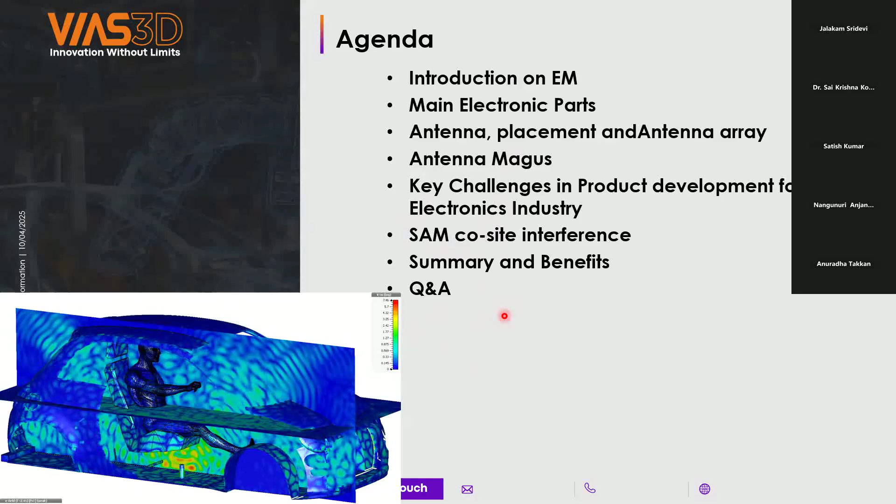So to start with the introduction, I'll just hide these. Okay, so we'll start with the introduction. What is electromagnetic, from where it started?

We know electromagnetic phenomena deals with all types of electromagnetic components. When we talk with respect to frequency, we know it starts with static, then goes to higher frequency ranges. All these components come under electromagnetics, and we can simulate all these components also.

Started with static, which is like low frequency or 0 hertz, we can say DC. If you comment about the application, something like touchscreen devices will come under the static frequency range.

If you comment about the application, going into the higher side of kilohertz frequency ranges, we have applications like transformers and wireless charging devices.

Going ahead in megahertz, gigahertz, and terahertz frequency range, the applications like RFID tags and some megahertz frequency antennas. Then at gigahertz, we have applications like mobile phones, and at terahertz, we have photonic devices. So these electromagnetics divide depending on the operating frequency they work on.

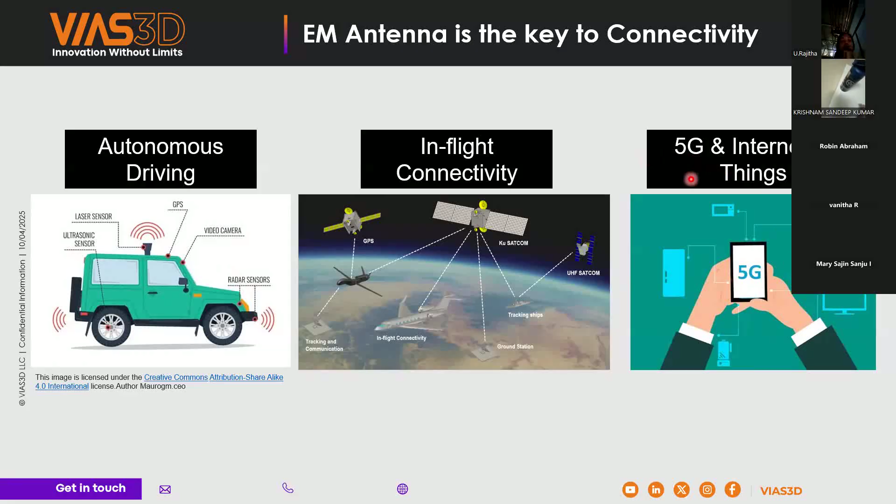So when we do total system analysis or any simulations, we have to worry about all these co-simulation components also, which make our antenna performance change. During this process, we have to work on multiple things where we have the workflow, how we start simulation of any RF component. And at the end, when we limit ourselves to the antenna, we have to do the simulations called antenna placement, where we see, once I place my antenna in an exact location in any application, how the performance of that antenna will be. So that will be the end thing for an antenna engineer, I can say.

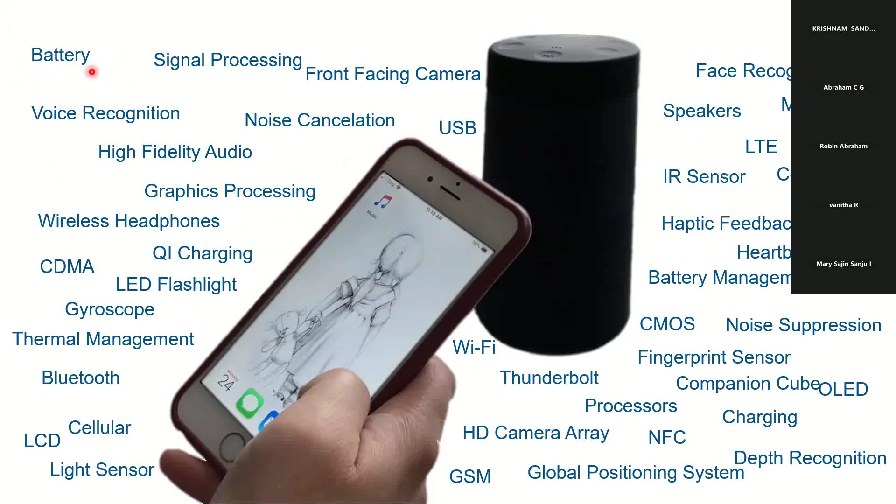If you take another example, like these speakers, which are bounded by multiple RF components, like IR sensors, USB devices, Bluetooth devices, Bluetooth antenna, Wi-Fi antennas, and multiple RF components. Again, the battery is also very vital to change the performance of the electromagnetic wave. So all these are application oriented. In any example, everywhere the electromagnetic waves are there and they affect the performance of your antennas also.

So if you see the key challenges when we go for any product development, take a mobile phone as one example, which is bounded by multiple antenna units, PCBs and all. In mobile we have 5G antennas. If it is LTE, then we have 4G LTE antennas, Wi-Fi, GPS, GSM, DCS, and again 4G LTE antennas. So it is bounded by more than 10, 15 different types of antennas, which makes the product very challenging because of the interference happening due to nearby radiative elements.

So we have to do the co-simulations also, where we check how much interference is happening once I excite, let's say, GSM antennas. And if you see this Wi-Fi antenna, which looks like an inverted F antenna, how much interference is happening. So when we talk about product development, we have to see all these interferences. At the end, we have to very easily place this RF component into particular areas.

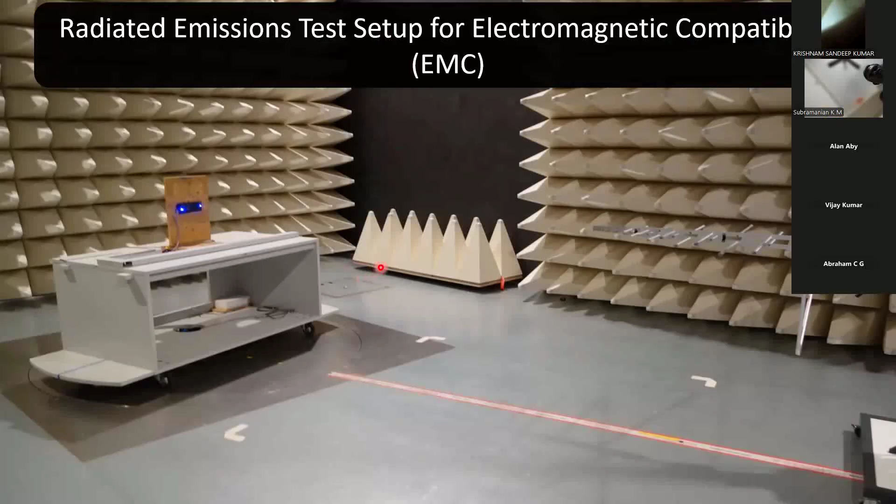And once we come up with the hardware, we have to go for an EMC test setup, where we do radiated emission simulations. So here we can see how simulation will help you. If you go directly into the measurement stage, we know 50 percent of electronic products will fail. So it is very essential to go for a simulation before going for a direct measurement setup.

Now, another example is the automotive industry, a car. The components which affect the electromagnetic wave are sensors. Multiple sensors will be placed inside a car. We have a battery unit, electric devices, and drives. Mainly, we have antennas, control units, and a cable harness also.

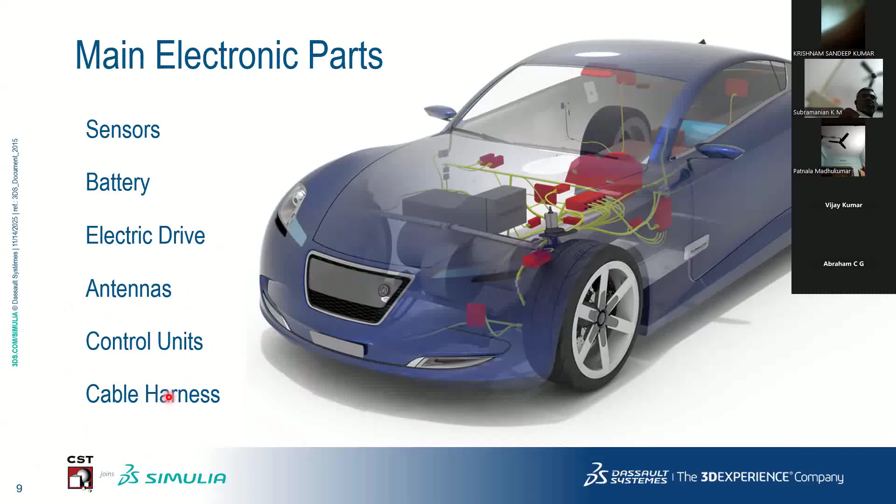Mostly, we have seen in the automotive industries, their R&D is going on to reduce the weight of the car. And we know 50 percent of the weight of the car is due to the cables inside a car. So to do any R&D on any vehicle, we can do this cable harness analysis also, which is very important. Now this is one small example of what components are available when we talk about a vehicle.

Hopefully you can hear this audio.

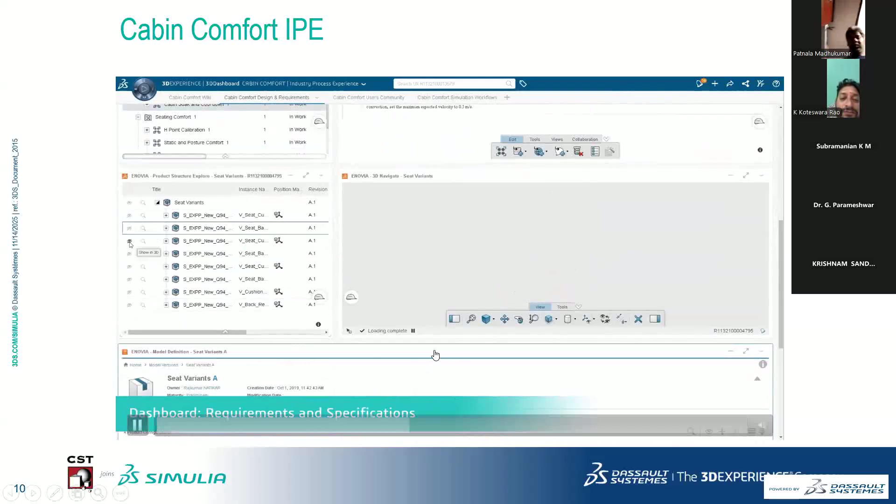So we can see here how any car can be designed connected with CATIA, electromagnetic CST, and Abaqus for structure analysis.

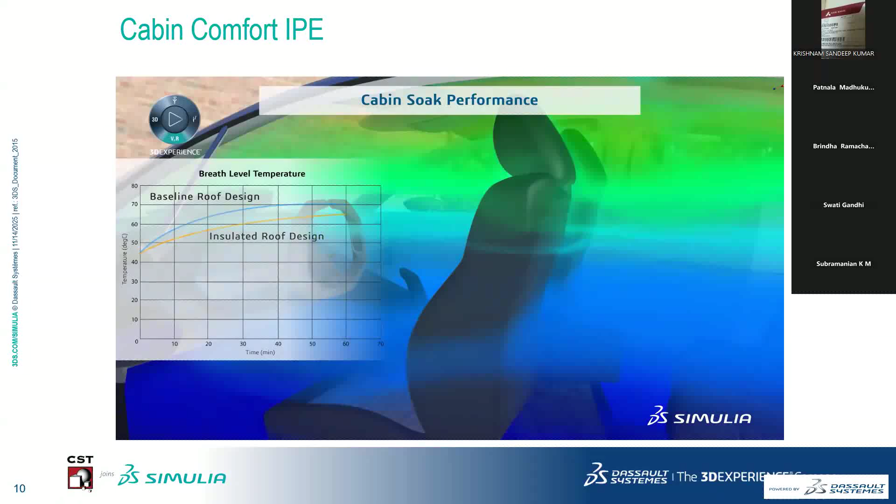So like this, there are multiple things when we take any example into the automotive industries or anywhere. We need to worry about all these aspects, starting from the designing till the final stage of that device. Again, design will play a very vital role. Then again, electromagnetics will be there because most of the components which are available in any car are electronic devices. The same thing applies for costing also, how it goes year by year once we do electronic performance into that.

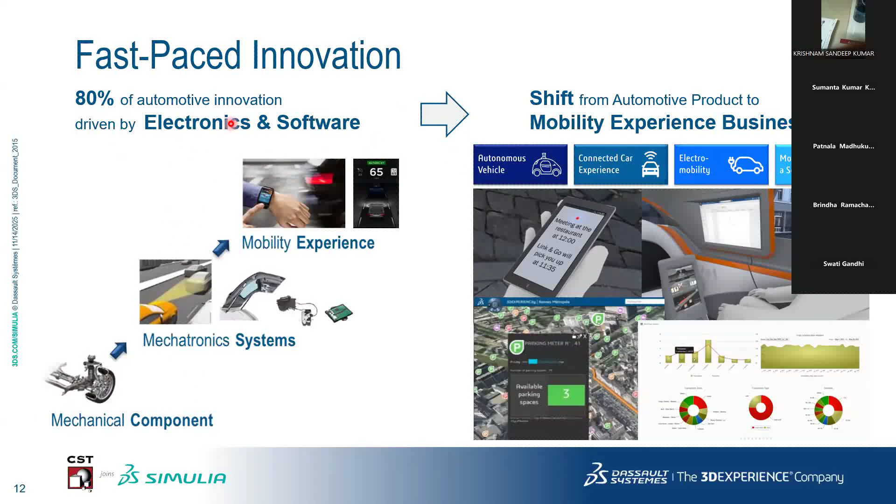So in the current market, where innovation is a preliminary task for all the automotive industries, we can see 80% of automotive innovations are driven by electronics and the software which are combined in any device. Again, the mechanical component is very much essential as well, but with that, electronics are also booming in the same ratio. So today's outline of the communication is the electronics side.

These are the three things: radar, where all the antennas will be available. Then we have connectivity, where we see how devices will communicate with each other. And external performance away from the car, how our electromagnetic waves are being radiated.

So if we talk about antennas, where are the antennas? If you take any industry, starting from automotive, aerospace, marine, offshore, high tech, robotics, and space, in most industries, to do the connectivity between individual elements, we need to have an antenna there. So antennas are everywhere, and they are an essential product when we do any analysis.

We'll go one by one, starting from a car, where a shark fin antenna will be placed on the top. It is also a rooftop antenna, where multiple antenna units will be placed. To have safety from the electromagnetic environment, it is covered with a radome. You can see here something like this color. The outside boundary is nothing but a radome, which gives shielding for your antennas from the environment or climate. All these analyses we can do in the electromagnetic simulation software, which is CST. Apart from that, we have multiple antennas placed inside any automobile.

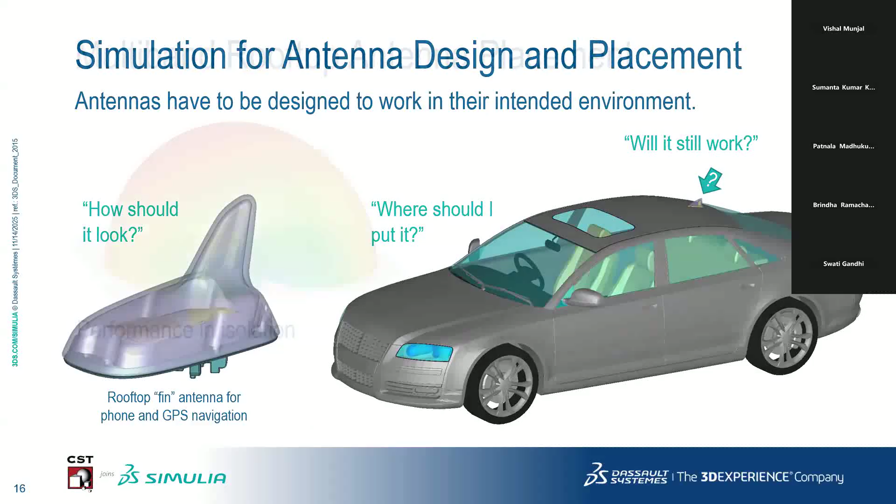Again, once we identify the location and keep that antenna there, we need to check whether it will still work or not. So the final check is done once we keep our antenna at the exact location. Only then will we get the certification from the automotive industry to place this antenna in this particular location.

You can very easily see by naked eye how the performance is changed. Once I simulate an isolated antenna with a radome, which is a casing for our antenna, I'm getting a perfect dome-shaped radiation. But once we place the antenna in a real-time environment, the performance will be degraded. So we get a very good idea at the simulation stage itself by placing my antennas in a real-time environment simulation.

Again, this applies for all. If you're working on any application like a smartwatch or wearable devices, you can do antenna placement simulations, where you can import the casing of a car, place the antenna in a particular location, and see how the antenna performs. How this can be done? Here multiple things will come into the picture.

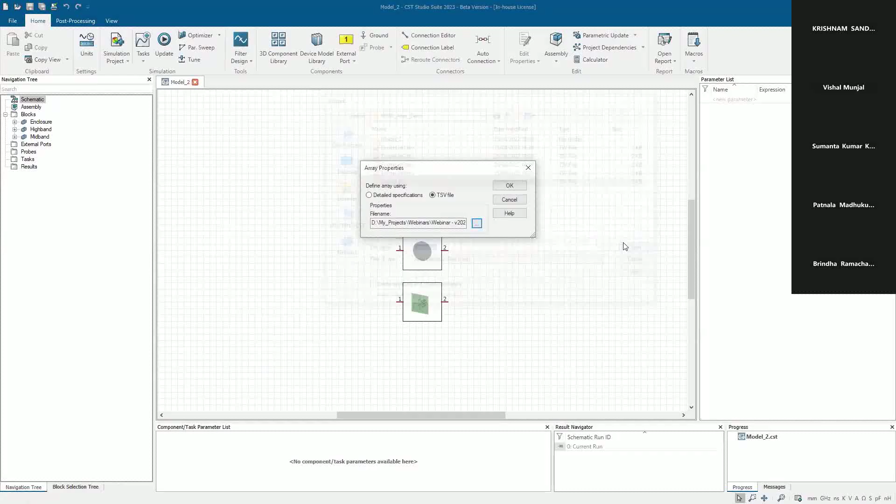I'm going to showcase an antenna array concept, how an antenna array can be simulated in CST Studio Suite. Starting from a single unit to an array, how it will be created, then bounded by a casing unit, and once I excite individually or cumulatively, how the performance changes. Here we have excitation by grouping, where we can excite a particular group with the same phase, and another with a different phase. That grouping you can do in CST.

Hopefully you are aware of CST electromagnetic simulation software. If not, then if time permits, I'll show you how these things can be done in real CST also. Here we can do the excitation part also, how I want to excite this. Same thing, you can import the excitation pattern also into CST.

Same way it applies to all the individual elements. So if you need simultaneous excitation or individual, you can select that also over here. These are mostly required for the phased array antenna concept, where we have to steer a beam. In the simulation part, you can have individual or array simulations also.

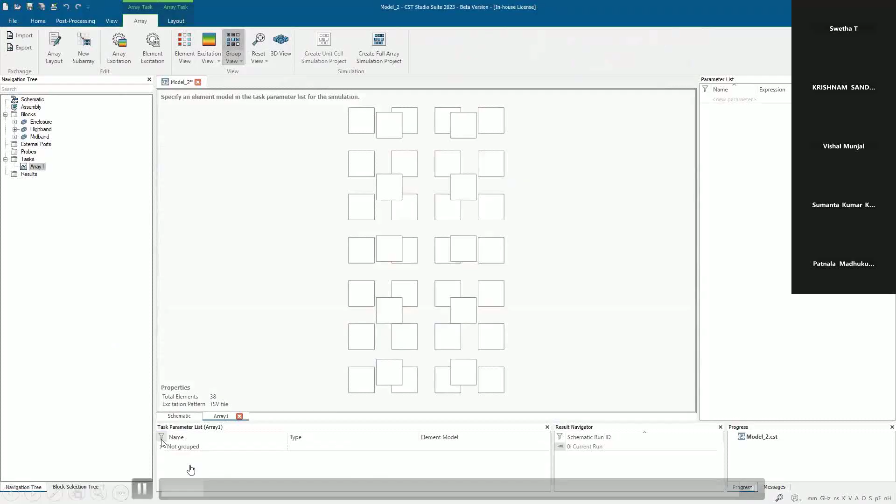Here you can see this is nothing but a casing, which is a radome in our case. Then we have the PCB excitation unit and then antenna units also. And once I give the excitation, you can see our final product will be available over here. And you can select here which way of excitation I need to do: excite all these array elements with simultaneous excitation or sequential excitation.

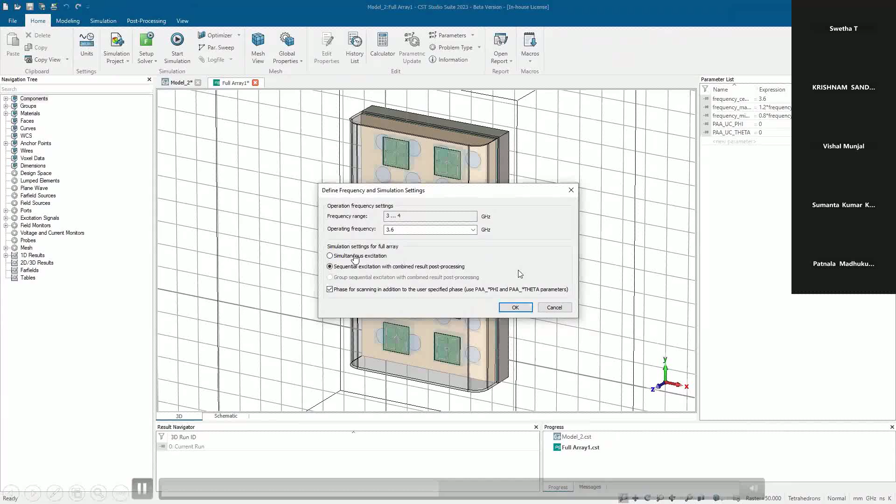So everything is inside a single environment; we can see we have this casing, the excitation units, radome, PCBs and all. So everything can be imported inside a single environment. And we can see how all these meshes will be available. If you want to give any user-defined mesh, that is also available, called local meshing. So that also you can give here.

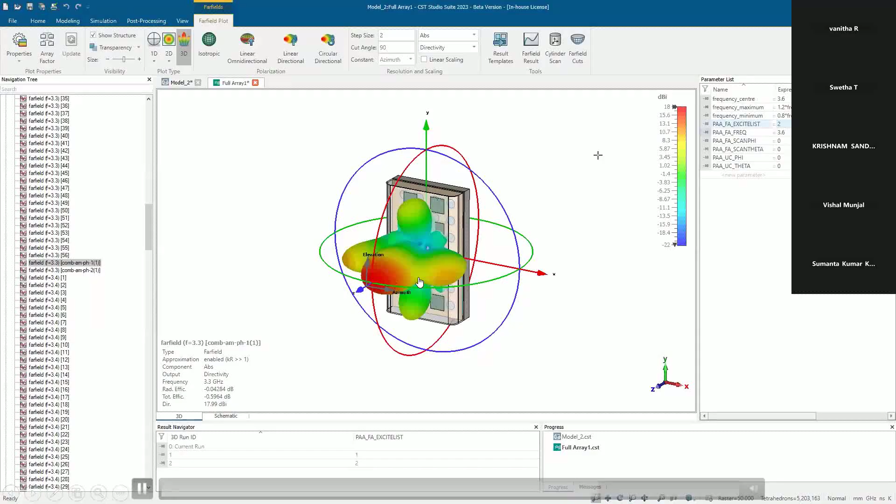I'll not stop here, but directly we can see the result, how the radiation pattern of individual elements can be seen, and combined also we can see here. This is nothing but the combined excitation of our array structure. Some post-processing can also be done, and we can see after post-processing how the performance is.

Co-polarized wave, cross-polarized wave, both we can see. So theta equal to 0, theta equal to 90 cuts, all these things can be very easily evaluated with the help of the CST software.

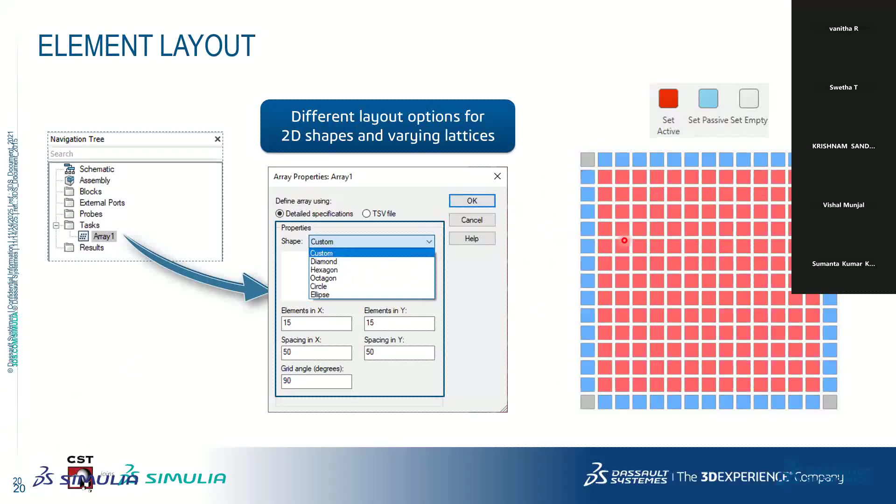One of the add-on features I would like to introduce here is the array task. For those who are working on the antenna side, this will be very important, how the array task can be used here. So firstly, as we always design a single element, we can proceed with that. After creation of a single element, we have this array task available here. You can see on the screen, left-hand side, array task.

With a single click, we'll get a new pop-up window. We can select which shape I need my array to be in: diamond, hexagon, octagon, circular or ellipse. So we can select any one of these shapes. You can select along the x-axis how many elements I'm looking for, and along the y-axis how many elements I need. So that element number we can give here.

If you need any additional spacing between individual elements, you can assign it from here also, which is available here. And there is something called set active and set passive. This is very important. So if you want to excite all the elements available in the array, you can set all as active so that you can give any phase shift if you want.

If you just need them to be passively available, so that you don't need to excite those elements, you can make all these elements set passive also. Okay. So that way you can keep these elements as set active and set passive.

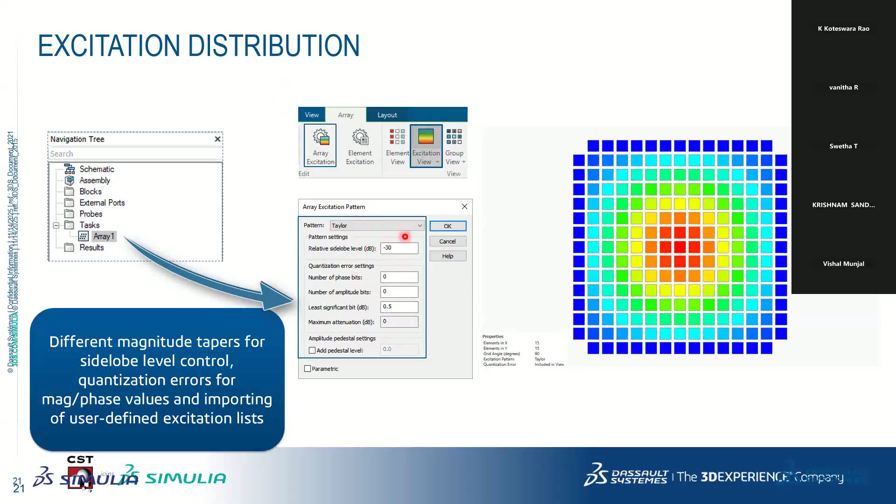So in this case we have this Taylor pattern, but again we can import any different excitation pattern also. So this way you can import things. If you want to excite from outside of this one, we can import using the .tsv file. And how the tsv file can be created, you can see it here. We have the positions, excitation, and rotation of the elements, considering theta and phi.

Again, this is very important. I'd like to divide this into system level analysis. If you have a system which is very good and high end with GPUs and hardware acceleration, you can go ahead with the full array simulation task. But if your system is very small in configuration, which makes it difficult to simulate the big structure, you can go with unit cell analysis of an antenna also.

Again, I would like to touch upon one more point, which is metamaterial analysis. Those who are working in that aspect need to set up this boundary condition as a unit cell also. The same thing you can consider here, which is a finite element analysis thing.

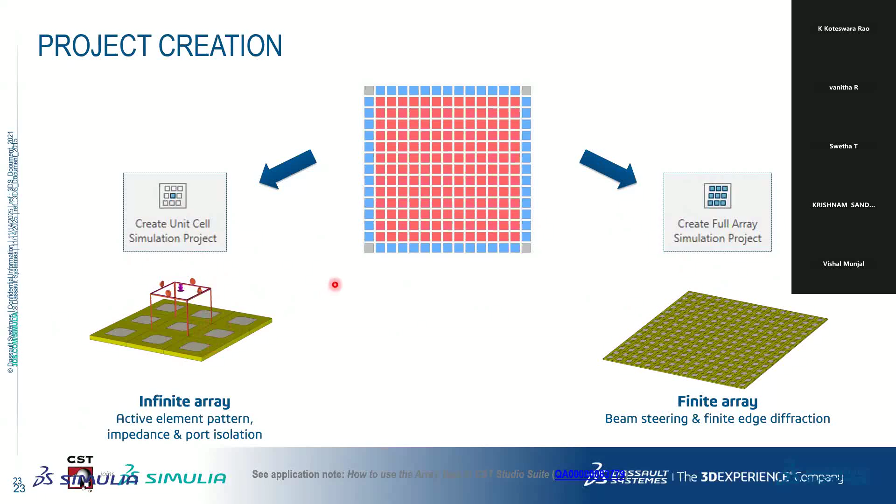Again, there is one more synthesis thing, which is Antenna Magus. For those who are working in industry and new antenna engineers, this antenna synthesis tool is very important, where Antenna Magus has multiple inbuilt antennas. So you just need to give your inputs. Let's see if I have it here. No.

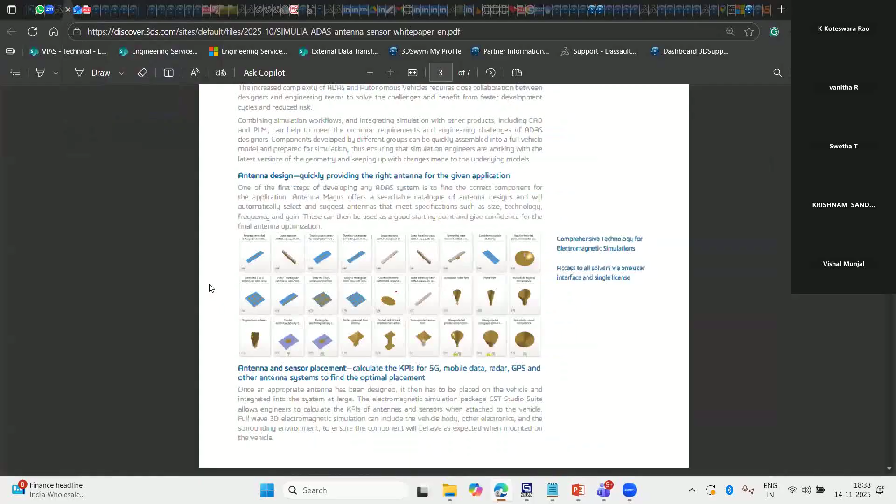So you just need to give some of the inputs, like what is the operating frequency of your structure, what are the goals you have. If you give those inputs, I'll just see if I have a PDF with me. Yeah. If you can see on my screen, these are the inputs you need to give. And depending on the selection of applications, you can get multiple antenna units on your screen.

Okay. And you can straight away just click on that and export those 3D structures inside CST. That is very useful for those who want to design multiple antennas in a short time, mostly for industries where operating frequencies and bandwidth change continuously. So for those, this is very important.

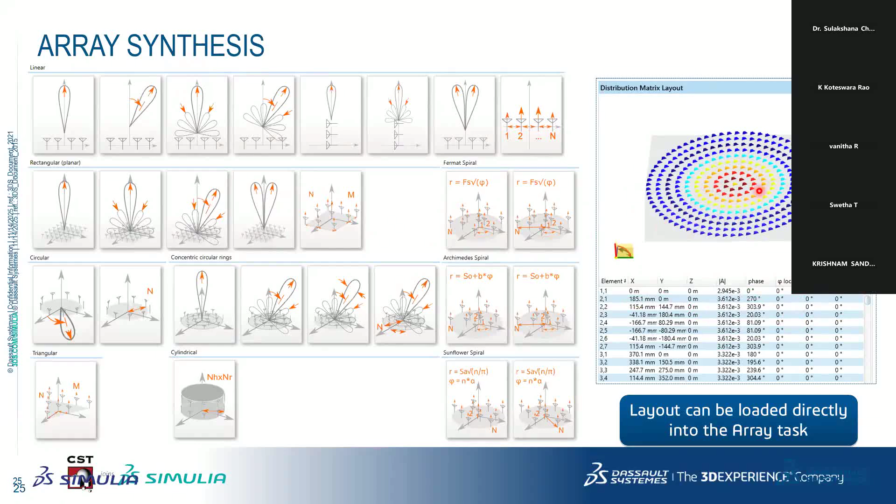Again, in Antenna Magus, we have antenna synthesis for the phased array antenna concept. If you want to tilt a beam in a particular direction, if you want beam steering, how much phase do I need to give. You just need to give the inputs, what layout you are going to use. Once you give those inputs, you can directly get 3D structures and export them into CST.

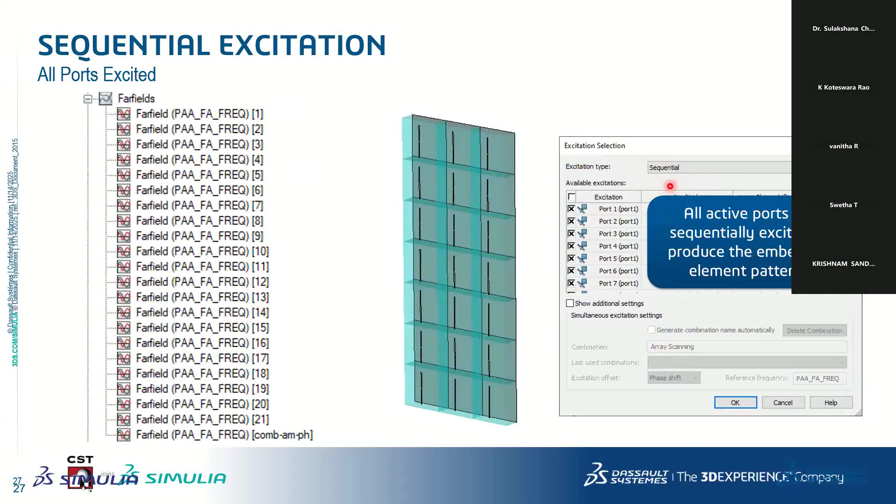And at the end, as we have seen total array excitation, in CST you have something called sequential excitation, where you can excite all the ports with different excitations. Let's say I have around 21 different elements, and I need to see the performance of each individually. With this excitation we can see how my eighth antenna is radiating, or the 11th, or the 21st antenna. And we can check the performance of a grouping of them also. Okay, hopefully this is understood by all.

Now, if you go into vehicle connectivity devices, if you take any one of the antennas, which is a Bluetooth antenna, 1 minute, yeah, Bluetooth antenna.

So in a vehicle, wherever the Bluetooth has been placed, whether it is covering all the units or not. Okay, so let's say you have Bluetooth devices located at a particular location. How your field is traveling, you can do that analysis also in CST Studio Suite. Let's say our Bluetooth device is operating at 2.45 gigahertz. With the help of electric field excitation, we can see where my electric field is traveling.

So you can see here in this case, our Bluetooth has been placed over here, and its electromagnetic field is going in this direction particularly. Very easily you can see the strong waves are going on the top side of the car also. So this is when there is no human or person in the car. But let's say when there is someone in the car, you can see your electric field is changed. Visually itself, we can cross check the performance of both.

But once we communicate with the human body, we have to see whether the electric field it is generating is hazardous for the human body or not. That is called SAR analysis, which is specific absorption rate analysis. Again, this analysis also you can do in CST. Okay, hopefully this is understood for all. Again, what we are discussing is one of the capabilities available in CST Studio Suite.

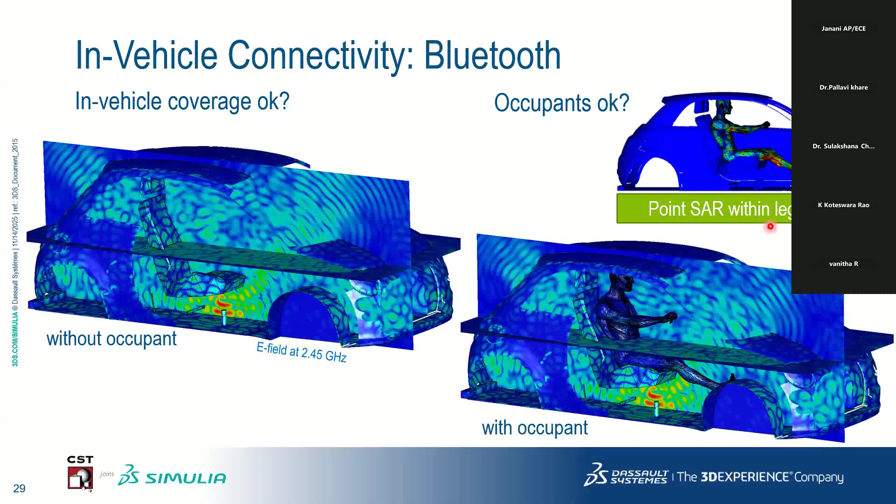Again, as we have seen, in any car we have multiple antenna units and PCBs. So we need to go ahead with co-site interference analysis also. We are limiting our thing with respect to the car, but the same applies for all industries. If you are working in automotive or space or aerospace or marine, everywhere you have to do the co-site interference analysis.

Okay, I think someone is writing something. Can we erase this? Can we remove these lines? No. No, something came on the screen. Option disabled only, sir. Option is disabled only. Disable? I disabled the writing options actually. I think someone has written just now, but I'm unable to remove it. I'm changing the slide, still it is there. Oh. I'll do one thing, I'll stop sharing and then share back. Yeah, great, sir. Is my screen visible now? Yes, sir. Yes, sir.

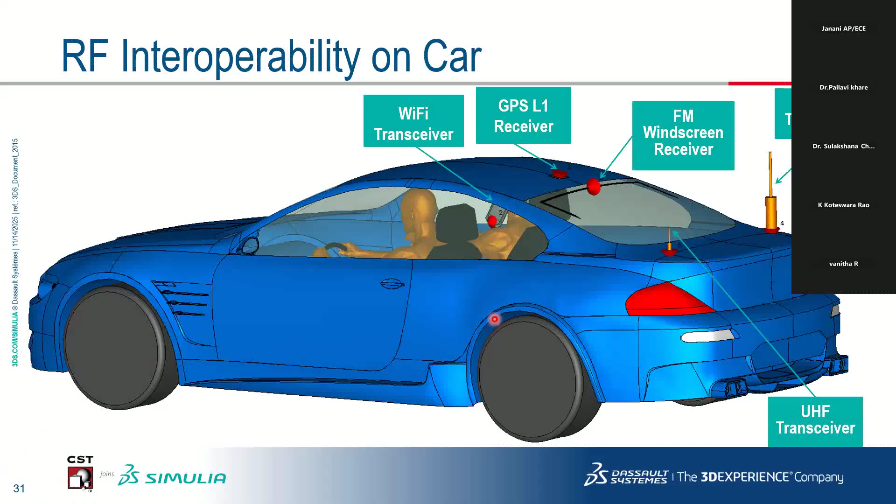Okay, thank you. So we can see in the co-site interference what elements are available. We have this Wi-Fi transceiver device, this GPS receiver, then FM windscreen receivers, VHF antennas, and UHF antennas. So all these are devices where we have to see how much interference is happening between these individual elements, and whether it is required or not. Like electromagnetic interference and compatibility: if it is in-band, we have to worry about that. If not, we can ignore those interferences.

Then how can we do these simulations? These simulations are possible in SAM modeling, which is system assembly and modeling, where we have multiple antennas. You can see here, this is one of the biggest advantages of CST, where you can have a car, which is an MCAD file with mostly mechanical information. The same thing we can convert into electromagnetic. So we can import that car in CST, and it will be created as a block available here in the schematic.

We can do all these individual simulations first. These are the 5 different antennas: UHF, VHF, FM, GPS, and Wi-Fi antennas. And all these will be imported into the schematic of CST. If there are any connections available, we can assign them. Again, by drag and drop, you can make all these antennas and the car available.

To place all these antennas at the exact location, we can use something called anchor points in CST. With the help of anchor points, all these antennas will be fixed at a particular exact location. Once you place them, you can see all these antennas will be available. And this 1, 2, 3, 4 is nothing but the excitations which we are going to use.

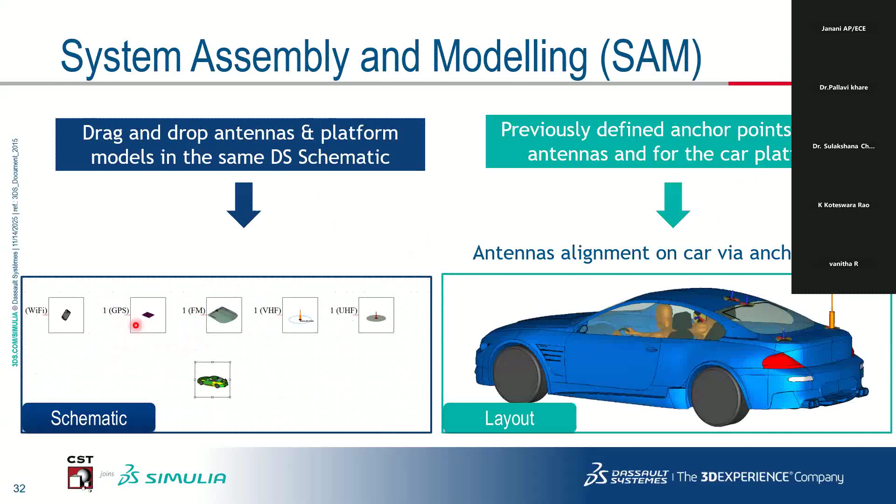To do the simulation, as we know, we need to excite that element, and before excitation we have to do the meshing of that. Depending on the solver, all the structures will be meshed. In this case, around 104 million mesh cells has been used to simulate all these 5 elements which are placed on a car. A time domain FIT solver has been used to do the excitation of these 5 elements.

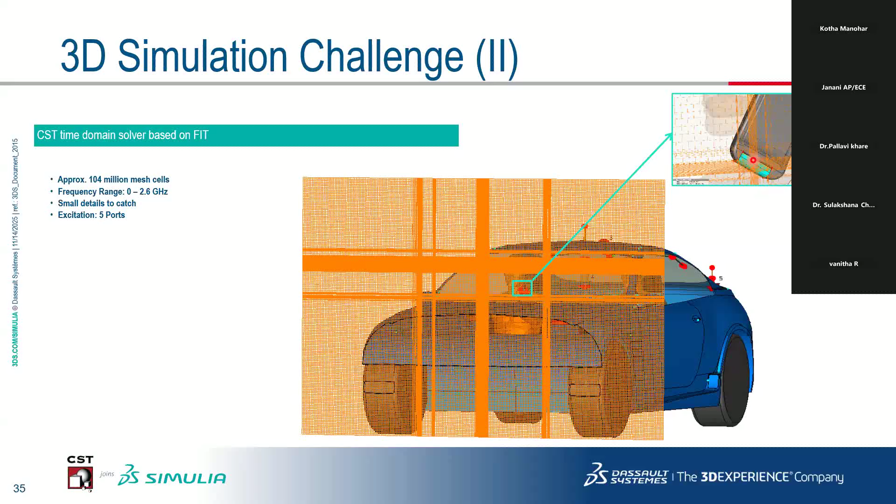Same thing as I told you, we can have these local mesh properties also, depending on how much dense mesh we are required for a particular region, we can assign that. By zooming in, we can see how this mesh has been assigned.

Okay, any doubt till this point? Any questions? If you have, we can discuss.

Audience query: Sir, can we use HFSS in case of this software? Response: I'm not aware about HFSS much, but as we are discussing, CST is having this capability where you can do all these antenna placement simulations with multiple solver capability.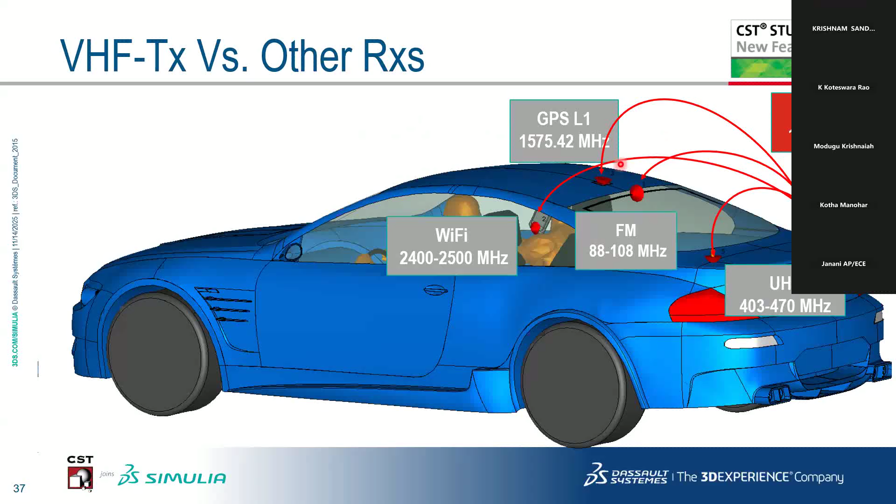Sir, with a human being, the electromagnetic radiation pattern has changed, right? Suppose if there is an object within a car, will there be any similar effect as a human being sitting there? We can create that environment, but for sure, the reflections will not be the same. Whatever the human body will do as absorption and reflection, other reflecting materials cannot do. So performance will change if there is any reflector there. And if you use two different conductors also, the performance of all the individual conductors will be different.

Yeah. So any other queries? Sir, can I ask you regarding the arrays?

Yes. Sir, in designing arrays, you have shown all the elements and how to give the phase excitations, everything, the amplitude excitations or phase things — a separate module is there in CST that you can use. But if we want to design our own circuit, like power dividers or phase shifters in CST, and integrate with the basic antenna array, and if you give the individual phase or amplitude excitations directly to the array, you will get a certain amount of gain, right?

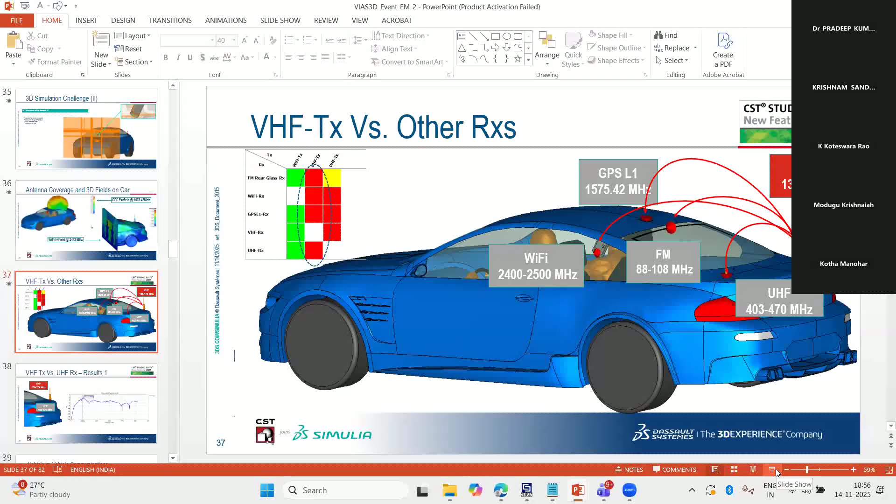So something like co-interference analysis of placement we can also do. If this power is affecting things in a bad way, then we can increase the distance, or use a metamaterial or something in between so that there will not be interference, or the interference can be reduced. We can do that optimization.

If you look at vehicle to vehicle communication, you can see this dedicated short range communication for vehicle safety or traffic control, mostly we go ahead with 10-meter spacing simulations. Both vehicles are apart from each other at 10 meters. This is very useful and important for ADAS radar systems, where we have transmitting and receiving antennas to identify how much gap is available between the two vehicles.

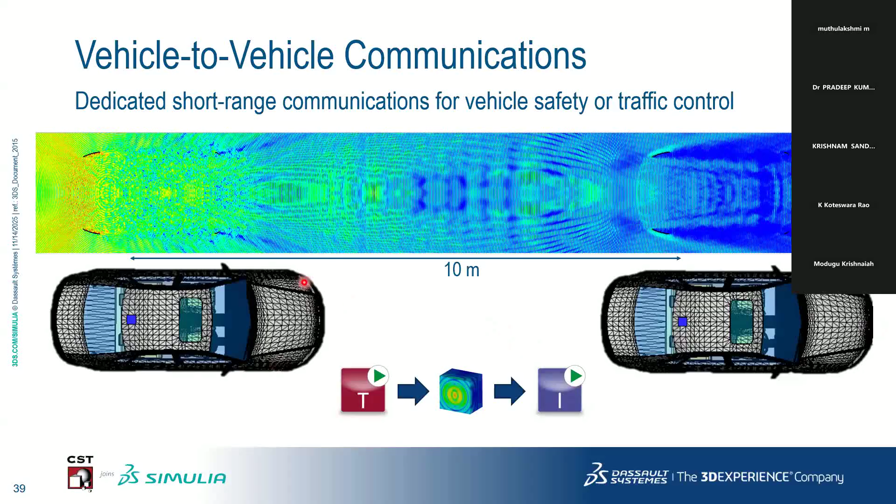Now talking about connected vehicles, these are the four analyses I can put forward: FM and DAB antennas, multi-band rooftop antennas which we have seen, connected vehicles or vehicle to vehicle communication, and ADAS radar operating at 77 gigahertz to identify how much object distance, or what is the gap between your transmitter and the object.

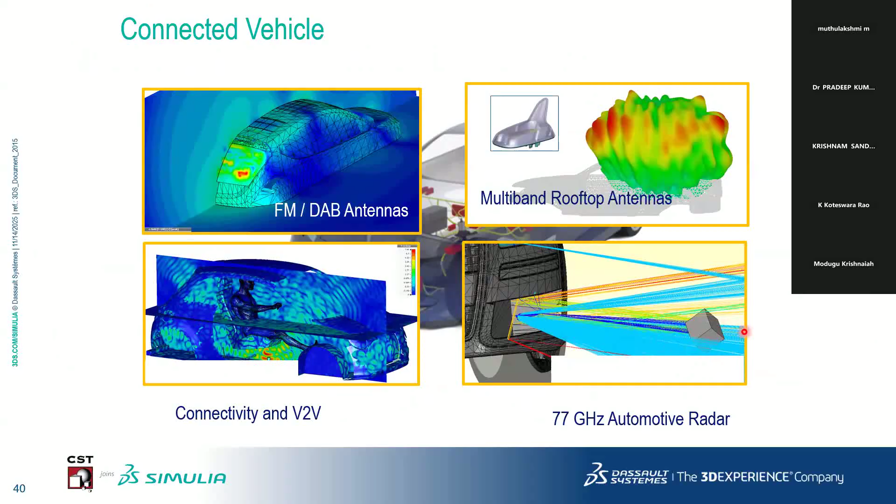With the help of ADAS radar analysis, we can very much easily check from where to vehicle is there, how much amount of speed is there, whether we have to reduce or not. That analysis is there, but also the electromagnetic side, we can identify that by placing the antennas into it.

Vehicle to vehicle communication or vehicle to anything communication, we can do that also in CST. Shielding effect is very much important here in this analysis. Whatever system has been designed, shielding plays a very vital role. How much gap between consecutive vehicles should be there? That will be answered by your system also here.

This analysis also you can do in CST, whether you have a bus which has been meshed by the integral equation solver, and we have the car as a radiative element can export its radiation pattern.

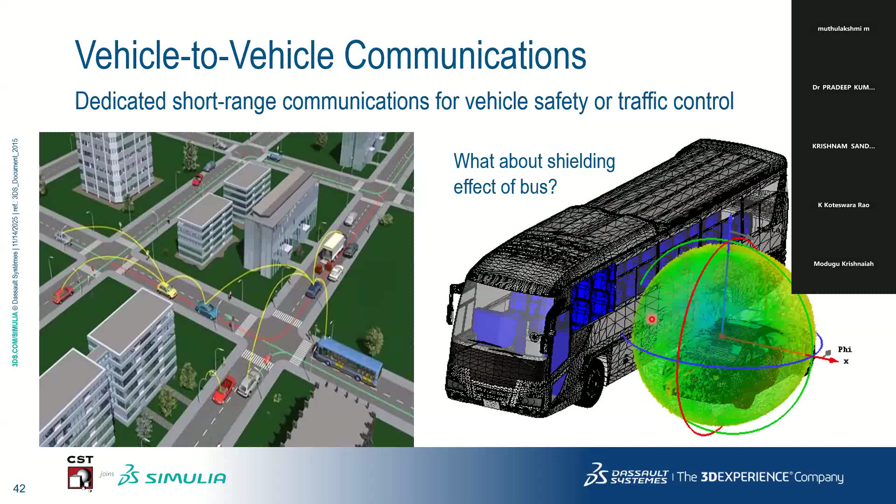And see how much interference is happening, or where the placement should be. This mostly operates at 77 gigahertz. If you want to identify the location, the 77 gigahertz radar antenna will be placed there. In the simulation, you can place those anchor points also, or else you can export its radiation pattern as a source. And you can see how the performance is there and all.

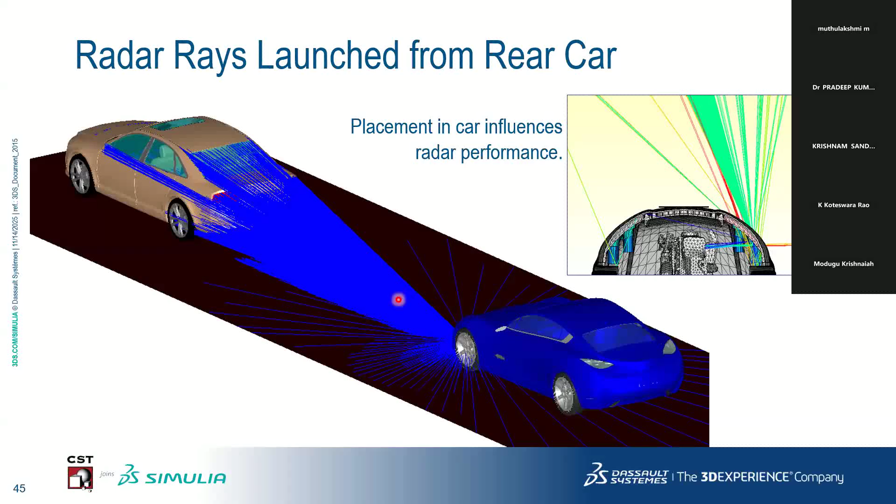Again, how two radars are checked in CST, you can see it here. The electromagnetic waves will be bombarded onto any device, and whatever reflections are there from there, it will predict the things. Rays are there, transmitting and receiving. Both vehicles will activate their antennas and see where the other vehicle is available.

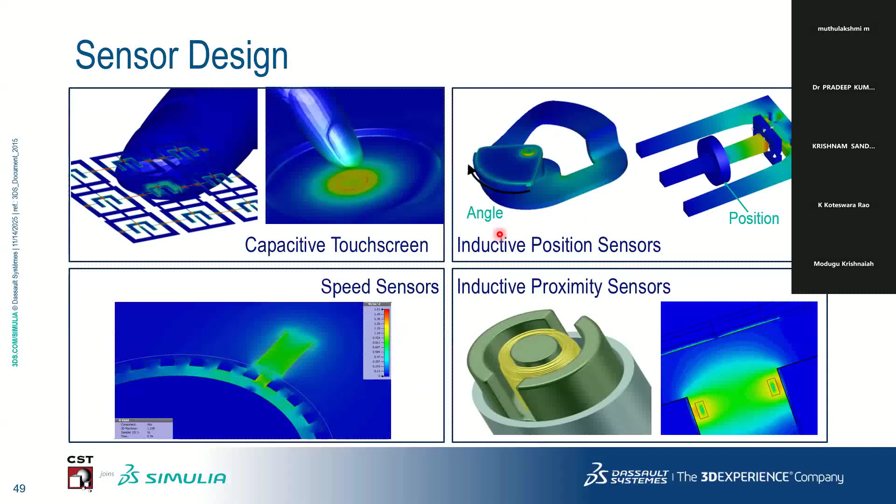I'll not go into the sensor part, because of its frequency it is a low frequency device, some hertz and kilohertz frequency range this will be there, but talking about the capability, you can have this in CST also, and with the help of that you can do this analysis.

Talking about wireless charging devices for any vehicle, that is also you can do in CST. How your field is traveled, how much power has been transmitted to your car charging unit, that is also you can check here. Efficiency of the charging also you can check, and by doing the exact location, effective amount of power can be transmitted from your TX to RX.

So all these wireless charging device analyses you can do. If any human body or human person is available inside a car, you can check whether it is harmful or not by doing the SAR, specific absorption rate, also.

Again, battery simulation also possible here. If you want to identify the induction motor analysis, whatever it is available in any device, that is also you can check in CST.

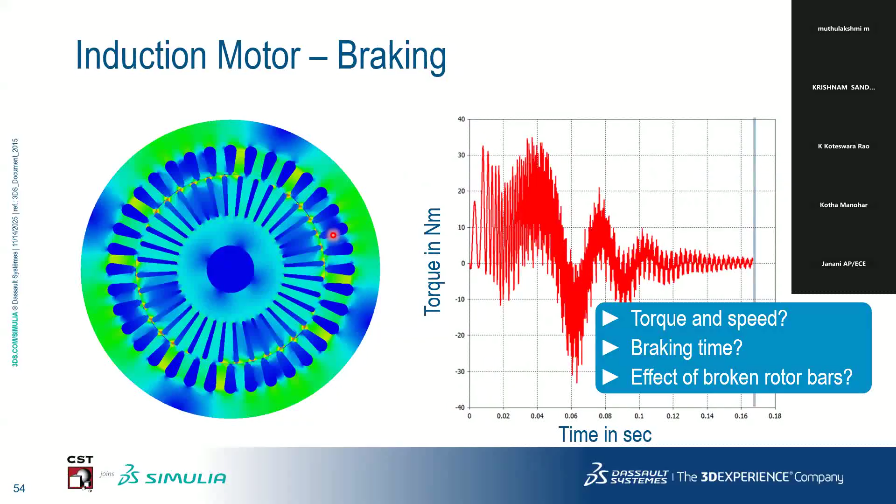As I told you, any vehicle's wiring and cables available, most of the weight is due to the cables available in any car. So again, these can be simulated in CST. It may be any power line cable or signal cable. All these can be brought inside a CST cable analysis studio suite, and we can see how that communication is happening.

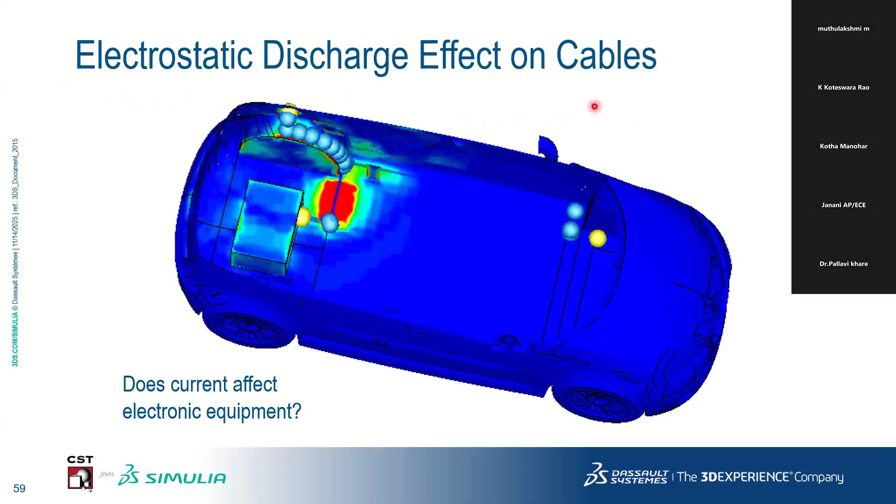Electrostatic discharge analysis also you can do here because of the heat and the temperature and the field available in the car. The electrostatic discharge analysis is very much useful or required once we talk about any cable analysis. Again, this is possible in CST. You can do PCB analysis also, radiated and conducted emission analysis is also possible.

I don't know if you are interested in RE and CE simulations or not, but I can tell you both simulations you can do in CST, whether it is for PCB level or for system level simulations.

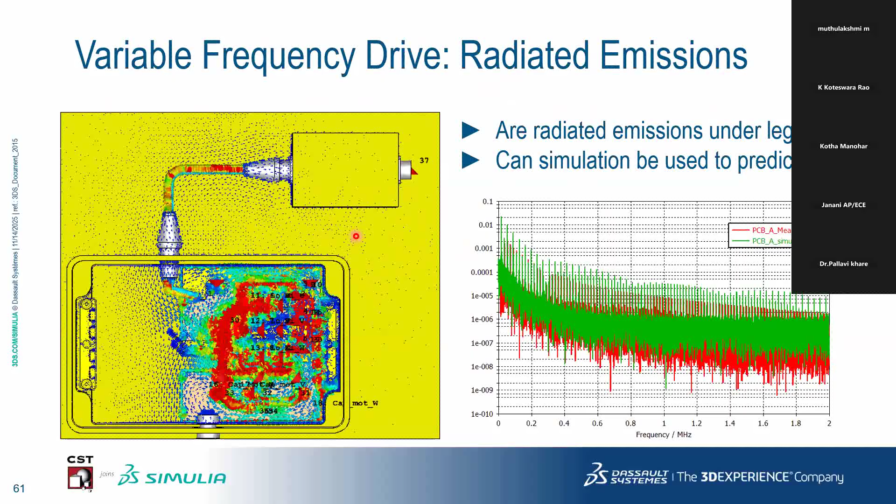If you have an antenna, in real time, how the antenna can perform inside any anechoic chamber with wood elements and absorbers, that real time environment simulation also you can do in CST. You can see here on screen both things, this is your real part, this is the software side, you can do that analysis also. And how emission simulation is there for any product, you can see here by seeing its electromagnetic waves.

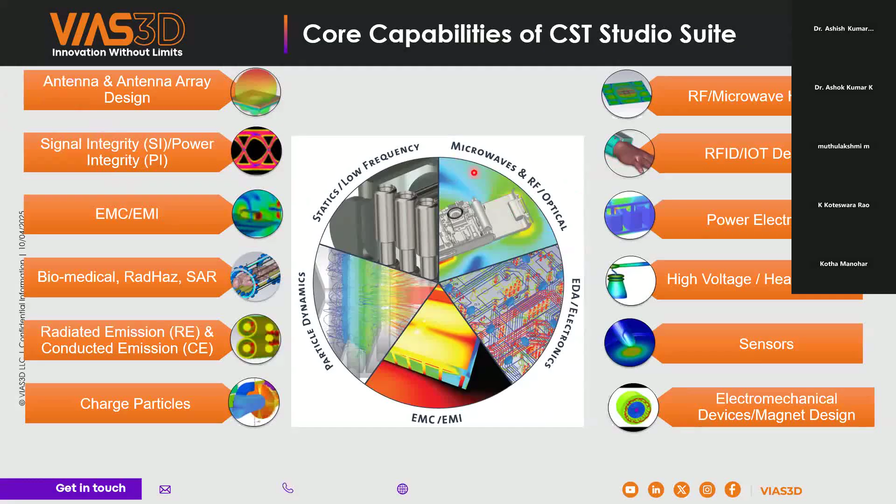Now I would like to talk about the products which are available with us, which is CST for electromagnetic analysis, as we discussed regarding the Antenna Magus, which is a synthesis tool for antennas. And if you're working on waveguides and filters, we have Spark 3D and FEST3D software with us also. So with the help of CST, you can do all types of antenna and antenna array simulation, SI/PI analysis, EMI, EMC. These are available here in the microwaves, RF and optical part.

Talking about importing and exporting, in CST you can import and export through IGES, STEP, SAT, and STA formats straight away. For 2D formats, you can export and import with DXF and Gerber. If you're working in ADS and Sonnet software, you can import and export straight away. If you're working on PCB, you can import and export using the ODB++ format. And if you're working in Cadence Allegro or any one of these software, you can import that file straight into CST also.

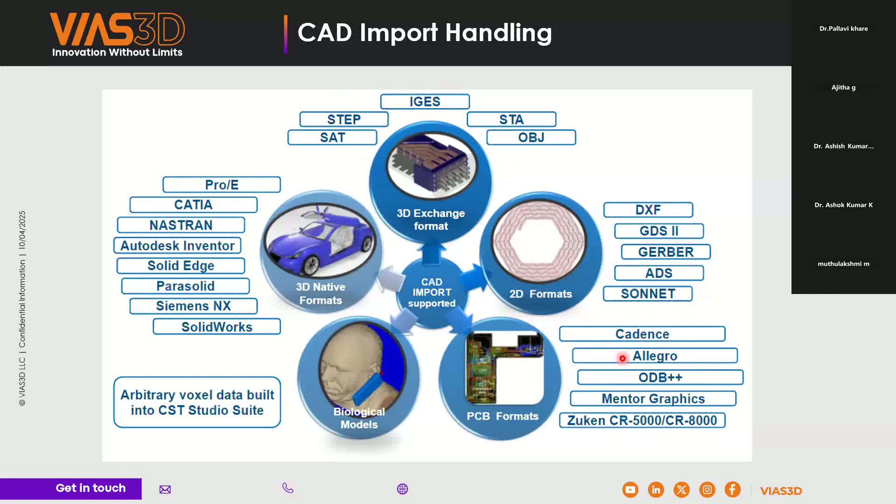Why are all these varieties available? Because of the solver capability. We have time domain, frequency domain, eigenmode, and integral equation. Multiple solvers are available in CST, so depending on the application, you can select these solvers and do the simulation. You can do all these electromagnetic analyses. With that, you can do circuit analysis and multiphysics analysis also in CST. EDA import is also available, EMI, EMC, all types of interference and compatibility. Cable analysis is also possible. You can import any ECAD and MCAD files in CST.

Okay, I'll not talk about this.

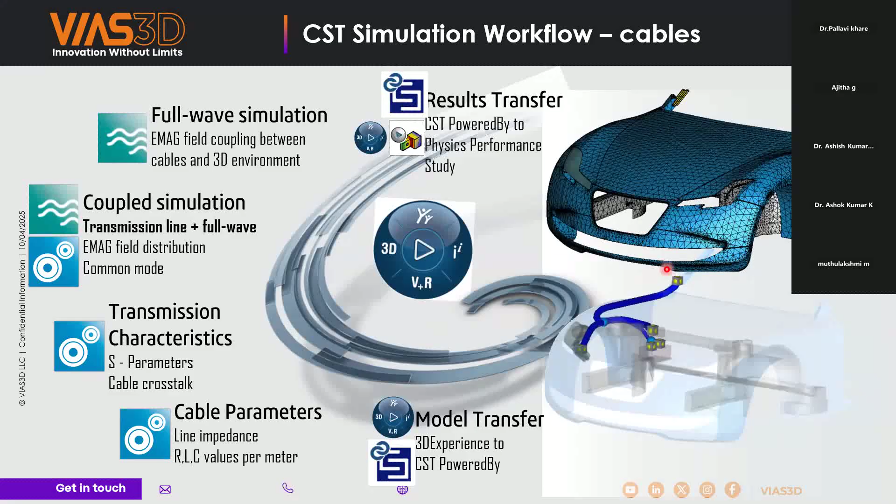So if you are working on vehicle-to-vehicle communication, where you have antennas and cables, sometimes it is very difficult to design this cable or car. So we have CATIA solutions. With the help of that we can also do that analysis. I'll show you this video where you can import any car and cable inside CST and see its performance.

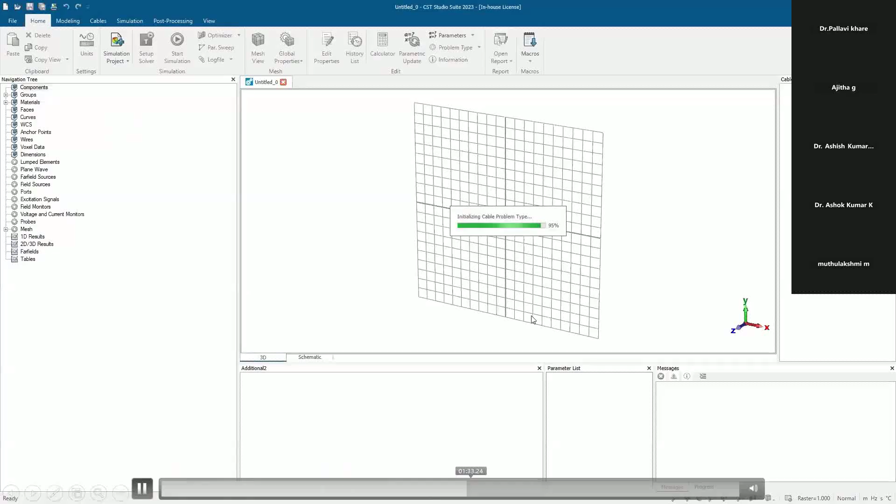So here you can see we have the material of a car casing. You can import the harness of the device. Here in CST, we have the 3DEXPERIENCE format, which can be dragged in so that whatever CATIA models are there can be brought into CST. Now you can see in this CST cable window how this model can be imported. And at the end we can simulate it and see the performance, how the electromagnetic waves are traveling. This way all these MCAD and ECAD files can be imported in CST.

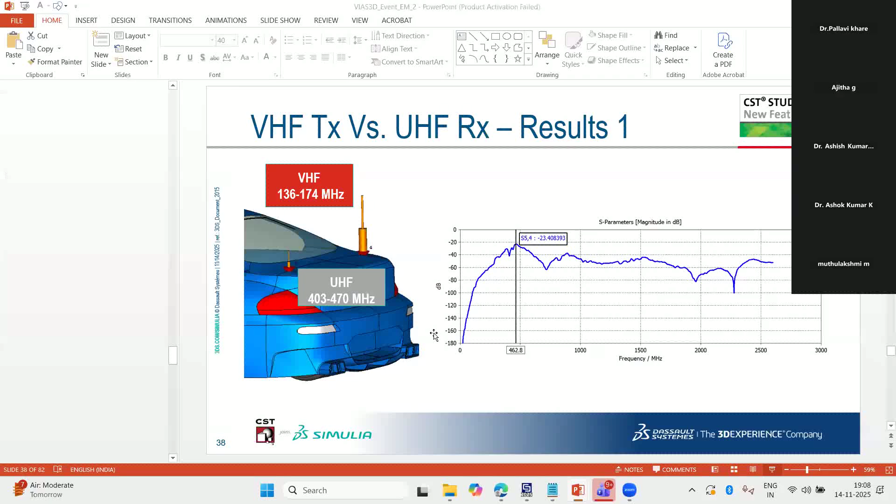If you're working on biomedical applications, CST also supports that. A wide variety of biomedical devices and phantom models are available. You can import them and see the electromagnetic behavior on those devices.

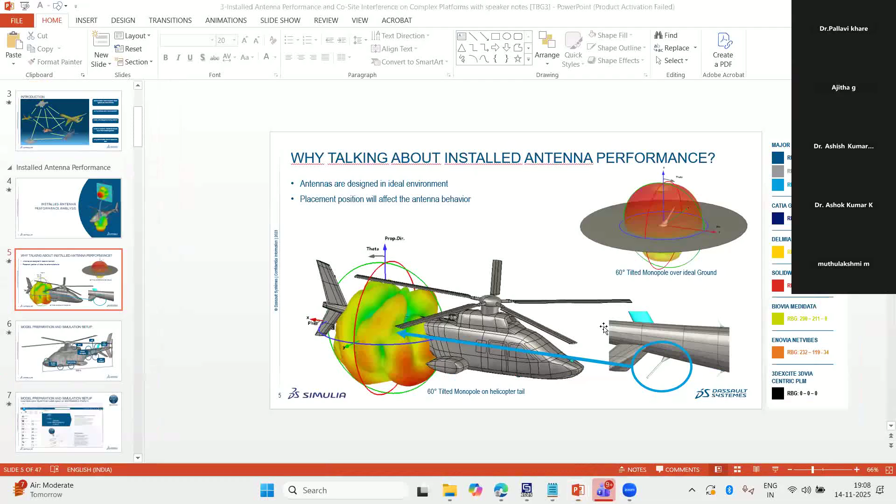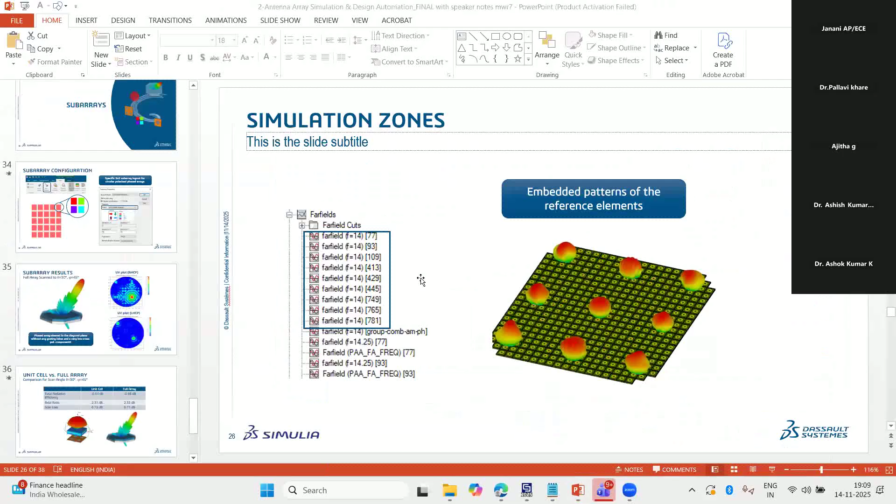So I have multiple things to showcase. I'll see. Yeah, this we have talked about.

I'd like to show in CST also how things will look. In 10 minutes, I'll cover this part, and if you have any doubts, we can discuss after this. So once you open CST, you can see a window like this will pop up and all these features are listed here.

If you are new to CST, there are already simulated models available. With the help of those you can understand. Let's say I'm working on antennas only. You just search antenna here, and whatever antennas are in the library, all these 3D models can be seen directly here. If I want to use a horn antenna, I can download it directly from here. And if I click on this arrow, that file will be opened directly here. Okay.

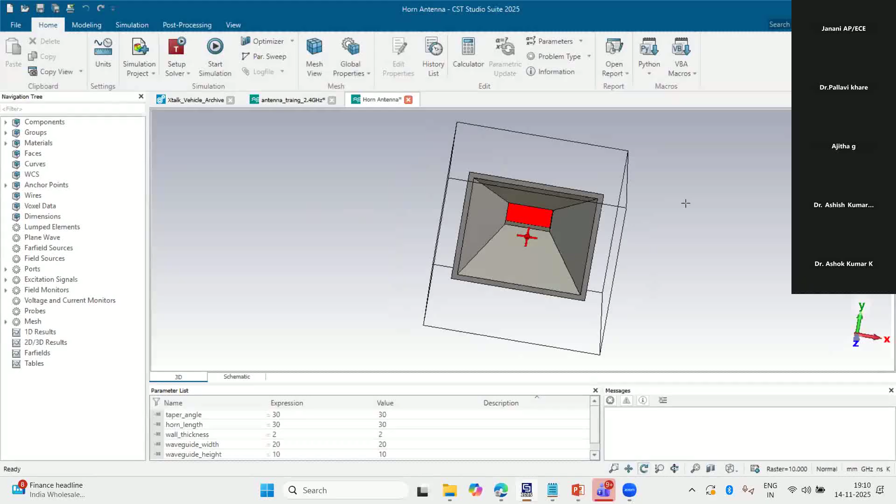So you can see here. So straight away, this type of horn antenna, you don't need to design and optimize that. Already pre-simulated, pre-modeled structures can be brought in. If I'm working on an array, 1x4 array or 2x2 array with excitation, everything can be seen here. Okay, 1x4 antenna with power divider networks and all.

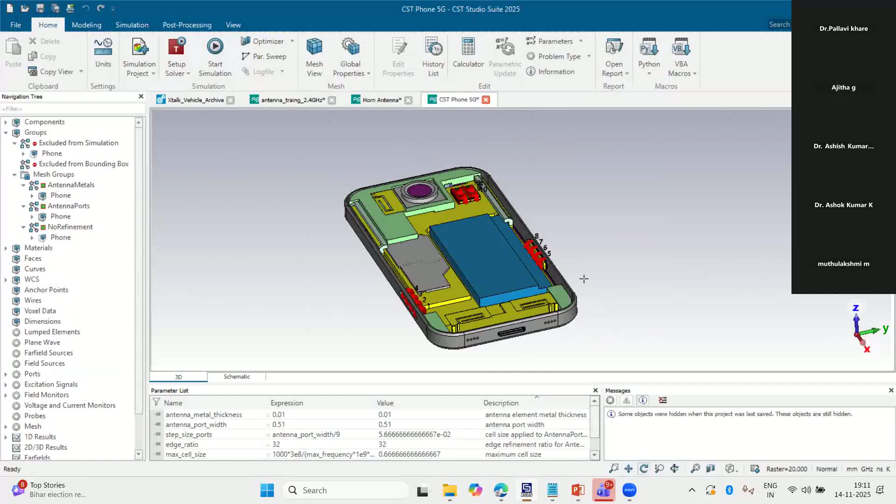Okay, multiple antennas again, dipoles with a mobile phone. Those who are working in automotive, mobile or telecom industries, for those to make our structures governed, certified, you can do the real-time analysis also. So you can import a mobile phone. You can place your antenna in any location, and then you can see the behavior of that also. So that way, you can do analysis of real-time things.

So this component library I'm discussing is very useful. Okay, for phased array antennas and all, predefined models are here. If you're working on a phantom for mobile phone or head, straight away you can import from here also. Or any antenna, dual feed antennas with the radomes and all. Okay. So the library is very wide. With the help of that, you can learn things if you are new to CST analysis.

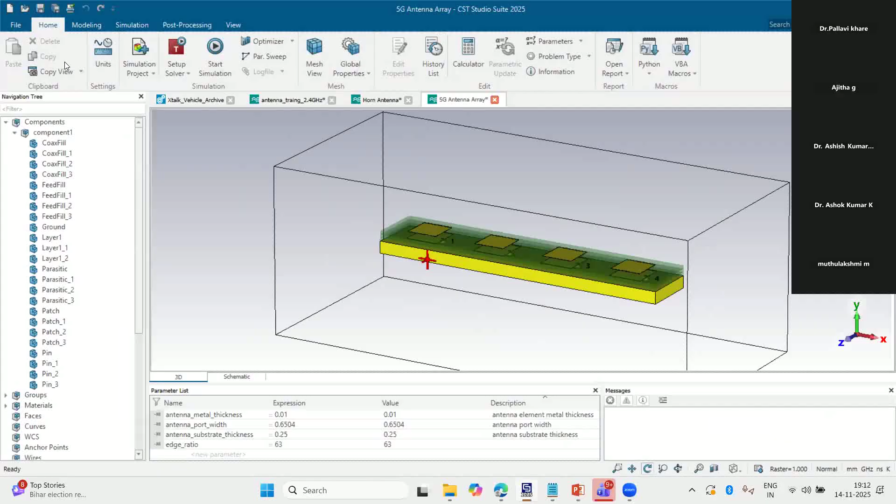So that is there. I'll just show you the way the environment can be created. So once you open this new template, from here you can import or create any 3D structures. So this way, you can create a simulation environment. If you give any frequency range, the environment will be created with respect to that. Let's say I want to simulate from 0 to 10 gigahertz. Depending on whatever inputs I have given, this rectangular radiation boundary box will be created.

Okay. So let's see if it is simulated. I'll just start the simulation to see its performance. Okay, so there are some primitives. With the help of those, you can create any complex structures. We have this import and export. What I talked about, any MCAD and ECAD files, from here you can import those files into CST.

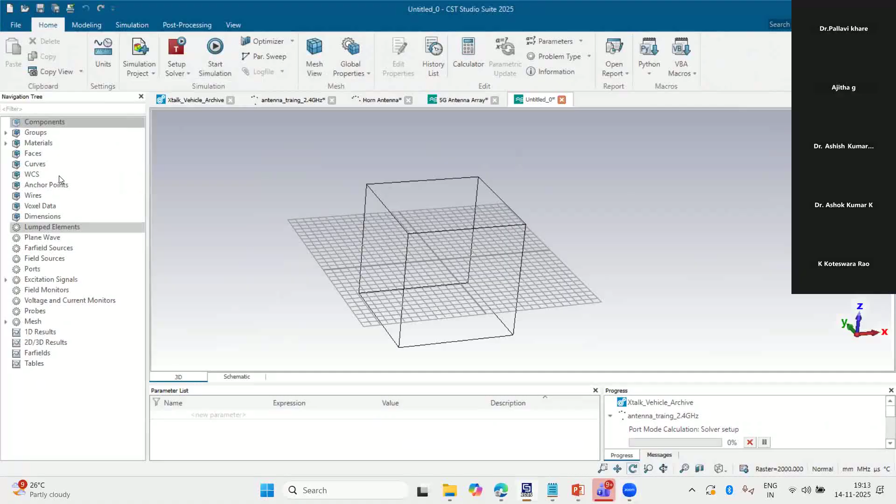We discussed the tasks. If you come here in Home, we have this array task option. Okay, let me bring in an antenna first. We'll take any circular one. Yeah.

So let's say you have designed an antenna and you need to create an array out of that, like we have seen. From here, if you click on the array task, a new pop-up window will be shown on your screen. And as I told you, different shapes can be brought in. So let's say I want to create a hexagonal shape where the side a is, let it be 4. Click on OK.

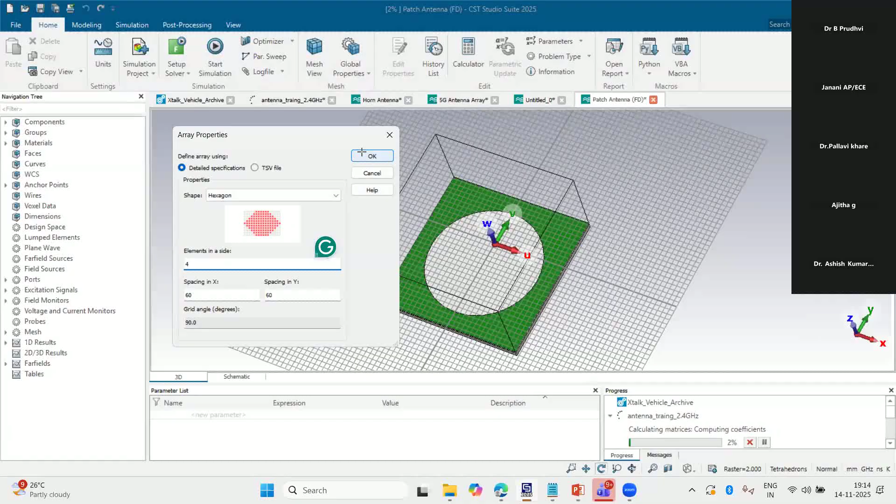So whatever I input, 4, depending on that, it has been created. If you want to extend that, you can also. So phase distribution, amplitude distributions, zonal excitation, we can give everything from here. As I told you, you can go ahead with unit cell analysis if you have limited hardware. But if you have good hardware, we always recommend going ahead with full array task simulation.

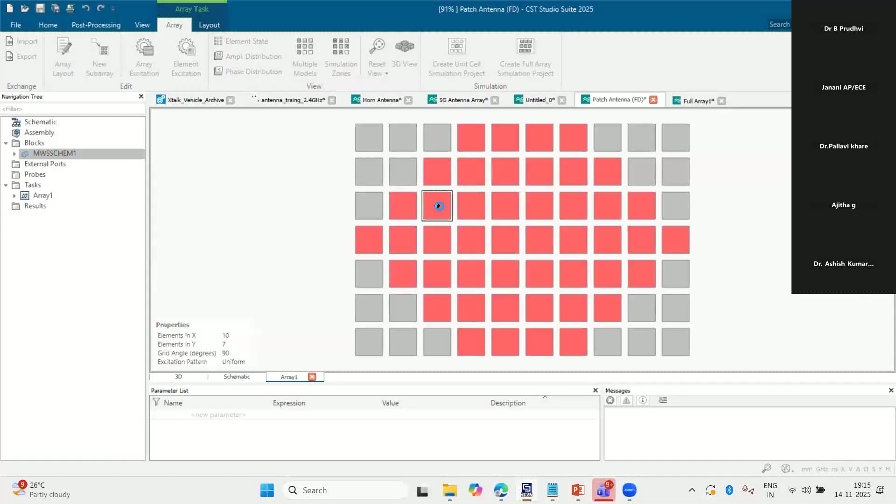Okay, here you can select the solver. Let's say we are going to use only transient. Then click on OK. So no need to do multiple things because of the complexity of the design. With the help of this task, any complex array can be created. Again, you can import any .tsv file also if you want a different shape of excitation. You can set up your operating frequency, then click on OK.

So you can see with these 2-3 clicks, we have created an array from a single element. Okay, and if you go here in the solver setup and click the solver type excitation list, you can see here we got more things also.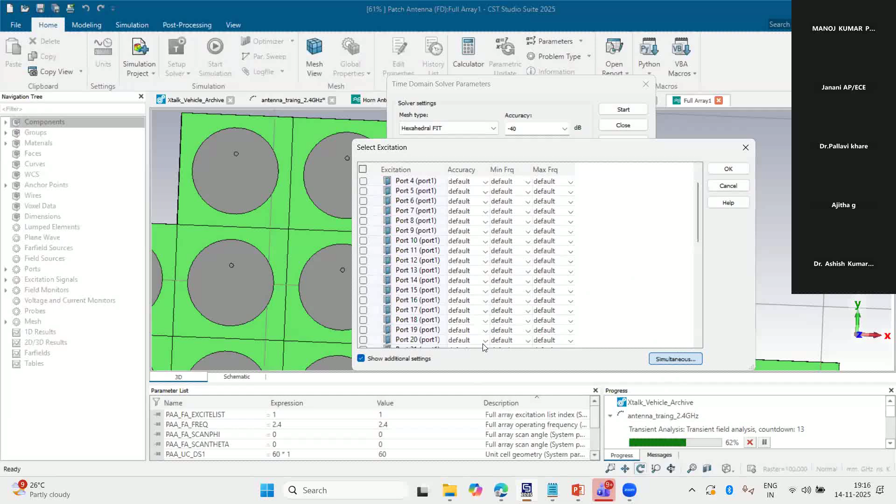If you want to go ahead with simultaneous excitation, you can click on that, and you can give different amplitudes also. If you want to go ahead with phase shift or time delay, you can set that also. So this way you can create it if you are new to the array task or phased array antennas. Okay, our structure is exciting.

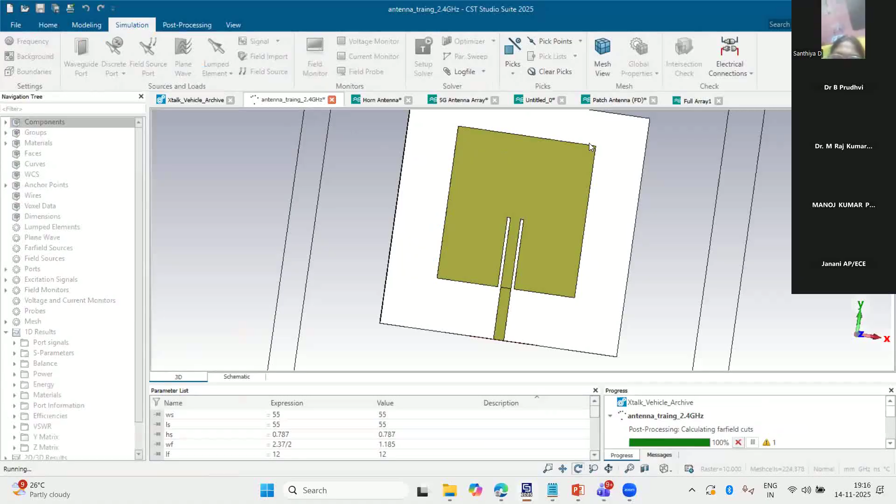Yes. The radiation boundary, is it predefined or does it automatically take the size? It will be predefined, depending on the simulation you give. Okay, I'll just go back to our structure. So whatever frequency we give, depending on that, the boundary box will be created. Now you can see here, this boundary has been created. Let's say I change the frequency. You can see the boundary box will change. Yeah, you can see, right?

So we should know what is the operating frequency of our antenna. So for 2.4 gigahertz, whatever should be the gap along the W max and W min axis, U max and U min axis, it will be automatically created. The user need not define the boundaries. Yeah, no need to define the boundaries, correct. You can see here, like this way.

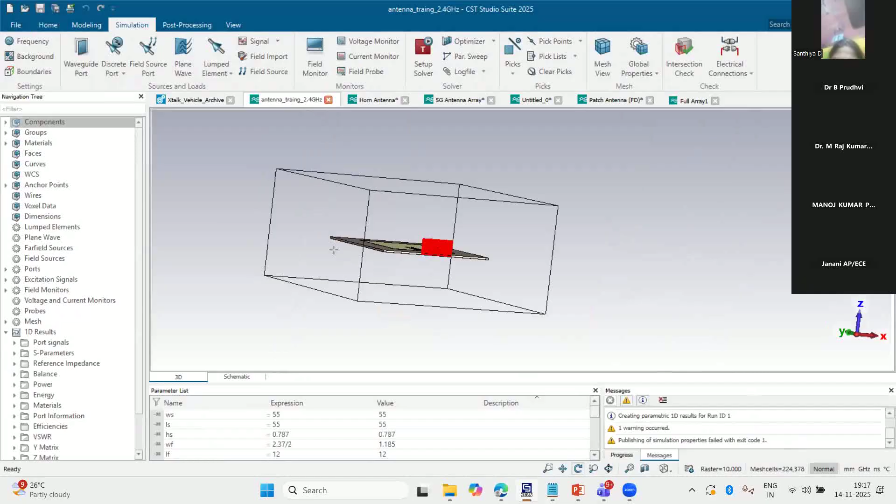Yogesh, is the student version available? Which one? Hello? Is a student version available for the students to do this? Yes. A student version of CST is available. For how many days? If you want any evaluation or something like that, our company can also work on that.

Okay. Is it FEM based or MOM based, sir? Is it finite element based or MOM based? Yeah, good question. We have all the solver techniques here. We have time domain, which is backed by the FIT technique, finite integration time domain. We have FEM in the frequency domain, eigenmode solver, MOM, and MLFMM, multi-level fast multipole techniques. So most of the techniques are here.

If you change the environment, as I have shown on the screen, multiple solvers are available, all backed by different design techniques. I think we have more than 24 different solvers. Yes, MOM is also there, and MLFMM. The SBR technique, shooting and bouncing ray, is also there, which is useful for RCS calculation. Those working on the defense side need this SBR technique. So all these techniques are available.

What is the system requirement for installing the software? Minimum 8 GB or 12 GB of RAM should be there. If it is better, it will reduce the simulation time also. The maximum number of mesh elements the software can handle? Millions and billions of mesh elements can be handled here.

If you want to check the hardware requirements, this is the link where we can check the processor requirement and the RAM requirement. The minimum here is 32 GB, but this is industry focused. As a researcher, if you are unable to gather this much, 16 GB of RAM also works. Which hardware to select, how much memory, GPU computing, if you need any information related to that, let us know and I can send it. Okay, sir. Thank you.

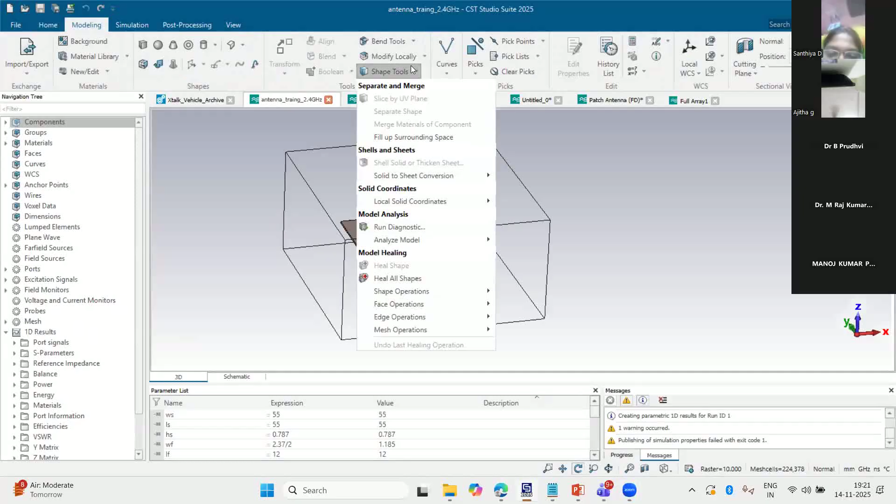Is it possible to design an arbitrary shaped patch? Yes, there is no limitation. All complex structures can also be designed in CST. This is a very good question. You can see it here. Any shape can be brought in or designed in CST. We have rectangular, cylindrical, torus shapes, cylindrical taps, elliptical shapes. With the help of that, you can design anything.

Again, it is not limited. We have curve structures also. With their help, you can create any curved shape, and that shape can be created in 3D also.

For defense-oriented applications, which type of antenna is used? Which one? Defense-oriented applications mostly need X-band antennas, 8 to 12 gigahertz. Okay. 8 to 12 gigahertz is mostly used by the defense sector. Okay.